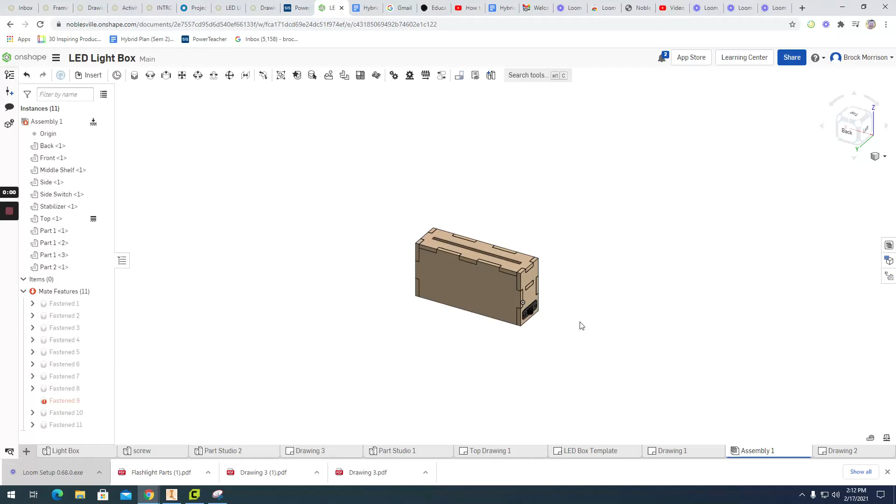All right, I'm going to do an exploded view demo for you. I have my assembly all set up. When you pull this up, your light box might look something like this. Go ahead and rotate it around until you have it positioned in a way where you can see the switch and the screws. It'll be easier if this is on the side that you can actually see.

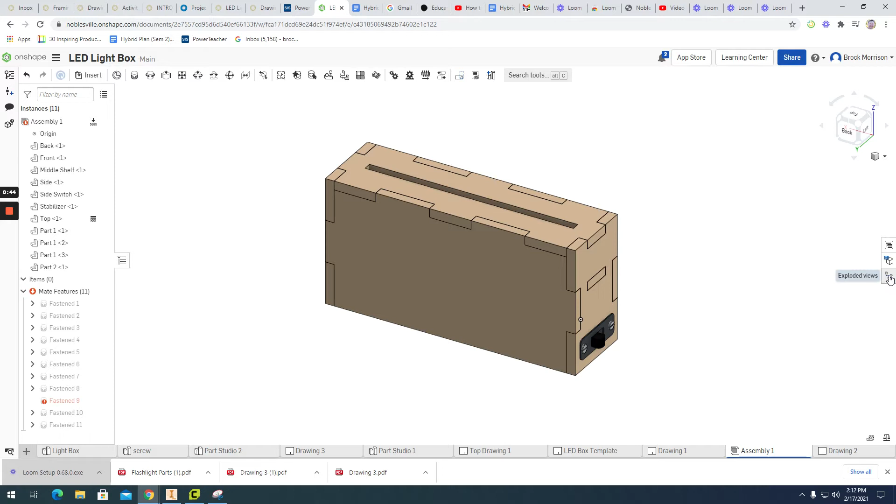To kind of square this up to make it look somewhat good, go over here to the view cube and just hit this little dot right on that corner, and it'll kind of swing it around just like so. So this is going to be the position that we're going to do our exploded view from. Over here on the right side we have three little buttons or tabs. The bottom one is exploded view, so let's go ahead and click on exploded view.

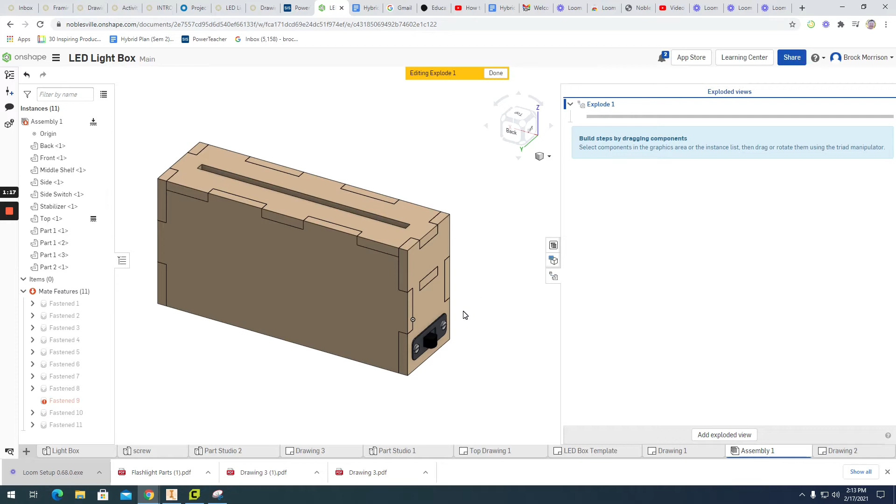And I am going to start to pull this thing apart. Actually, I've already done an exploded view, so let me delete that one. And for you guys it'll look like this because you don't have any exploded views. Add exploded view, and the first one just defaults to explode 1. And you'll know you're in exploded view editing mode when you see this orange yellow bar up here. So let's make this a little bit smaller so I've got some room. Slide it over. And let's start pulling this apart.

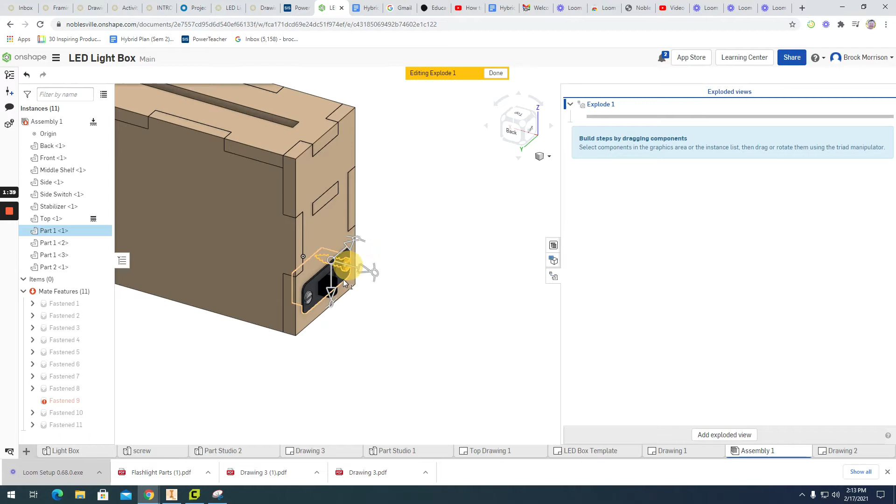First thing that I want to do is I want to grab all of these pieces in the switch, and you can click on them individually. Let's see, if I grab the screw, the other screw, switch. Sometimes it's tricky to hover over all of that. Depending on the order, it might be a little bit easier. And I also want this side. So I'm going to grab all of those things together, and I'm going to grab this arrow because I want it to pull it perpendicular to the object.

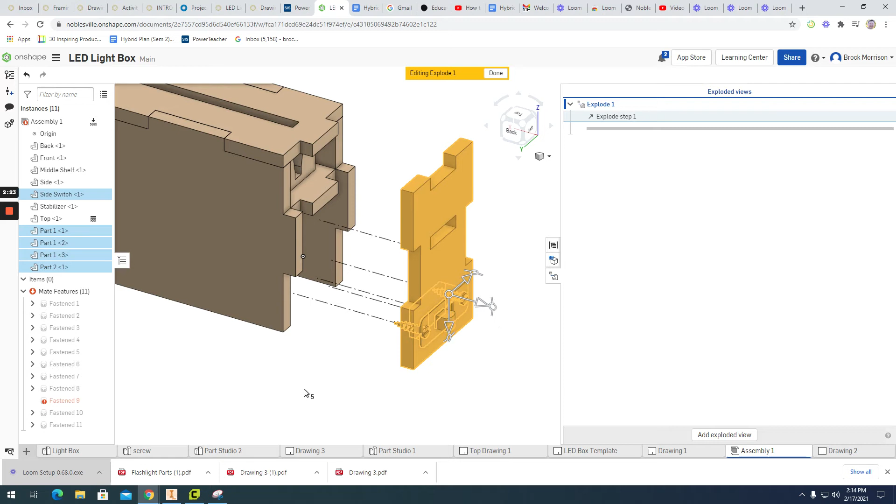As soon as I let go, this little dialog box opens up, and you'll see distance. And I've kind of just pulled it to a distance that looks pretty good, and it's really close to 2. So I'm going to click on this and actually enter 2 and hit the green check. All right. Double click anywhere, and it'll let go of all of that stuff.

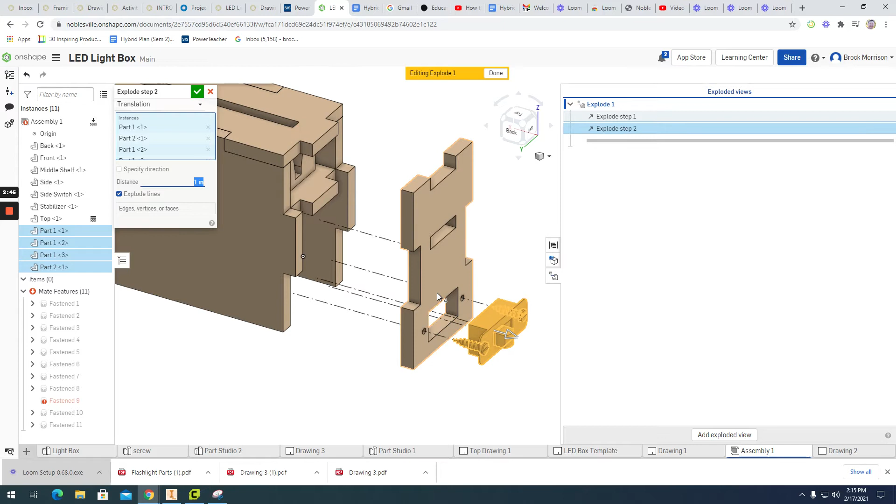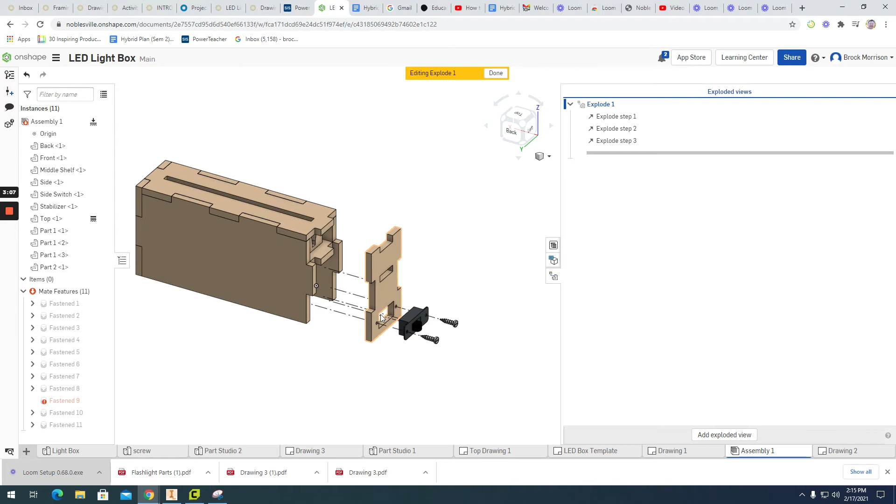And now I want to take these items, those items, and I want to pull that away. And I'm going to make this 1. Okay, and now hit the check. And now in the background somewhere, I want the 2 screws. And I'll pull those out from there. And I'll make that also 1 inch. Alright, so there we have some exploded view with the screws going into the switch, going into that opening, and then attaching to the sides.

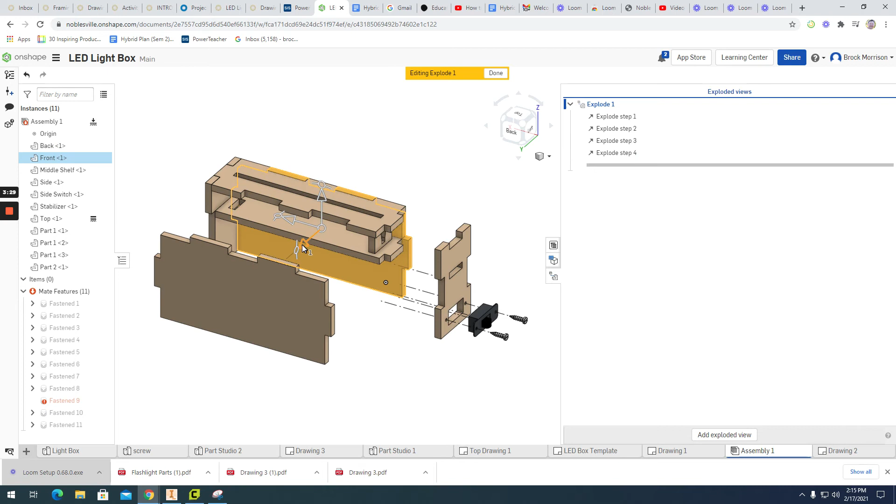Alright, so let's go ahead and break the rest of this apart. You're always grabbing the arrow that's pulling perpendicular from the actual object itself. I want this, I'm going to actually give this a little bit bigger distance. I'll go 3 inches on that one and hit the check. You have to hit the check every time you want to change parts or directions. I'll have that. Notice this was a negative because it's moving in the other direction. So -3 on that one.

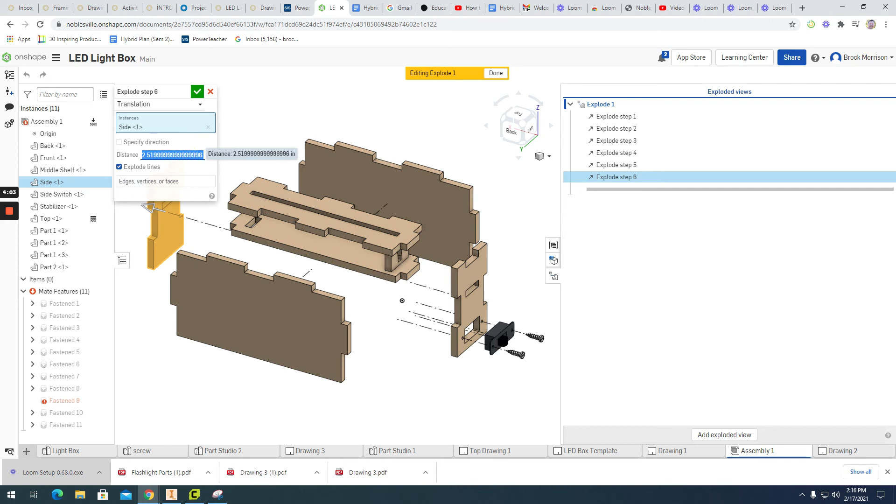I'll take this side. Whoops. And if you don't hit the check, then it assumes it wants to connect to that first part you pulled out. So I'm going to delete that side, hit the green check, and now I'm ready to do this piece. Pull that out in that direction. Paying attention, like I said, to whether you've got a negative sign or a positive sign, depending on your orientation, pull that piece straight up. I'll go 3 inches on that one.

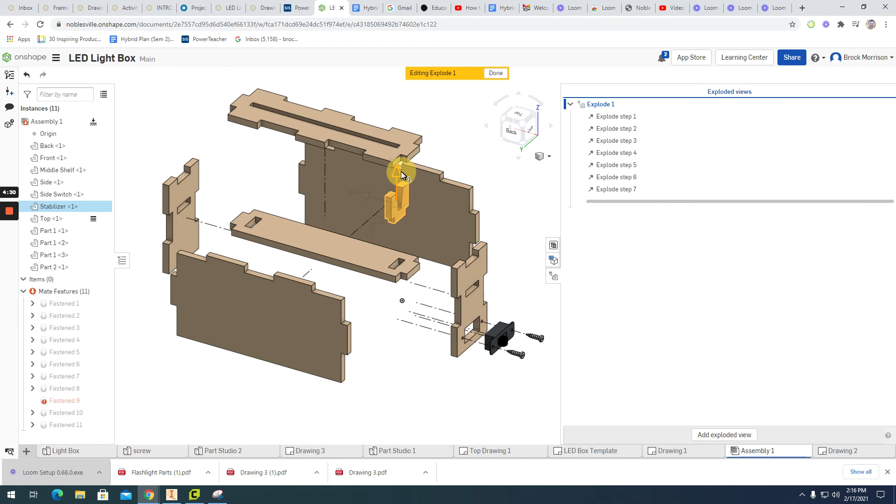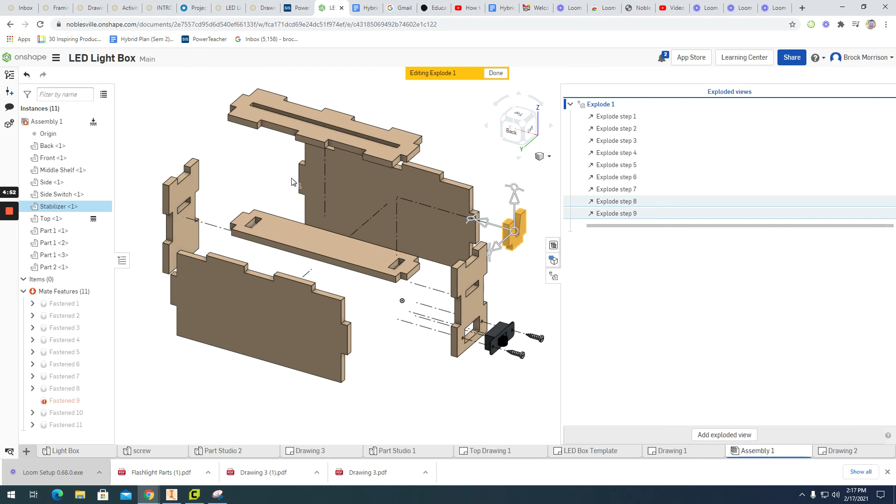I'm not going to do anything with the middle piece, but I'm going to take this piece, hit the check. I'm going to take this piece, I'm going to pull that up. I'm going to move this in 2 different directions. So I'll pull that up. I'll go 2 inches up and hit the check, hit it again, and let's move it in this direction. And I'm going to go minus, because there's a minus sign, -4 in that direction. There we go. And here we have our exploded view with all of our pieces kind of breaking away from that centerpiece. All right, well that is it.

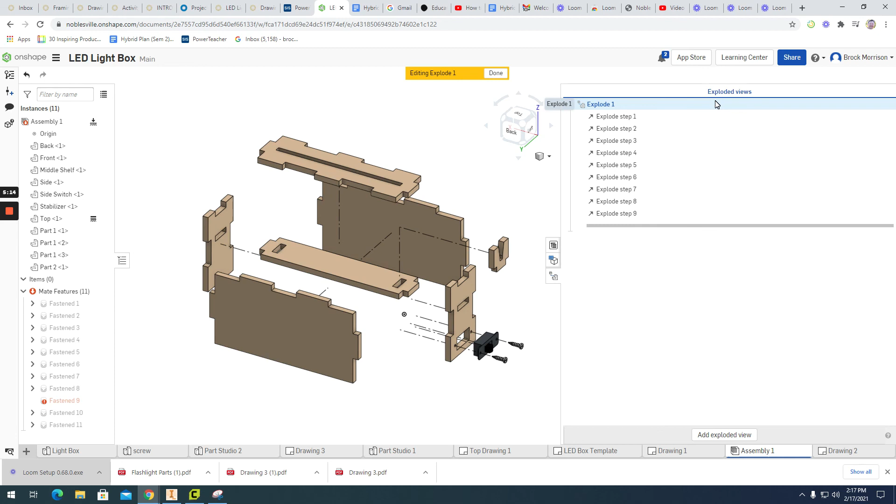We can close this little exploded view and you'll see that it takes up the full screen. If we actually click done on editing exploded view, it snaps back into our original assembly. I'm going to show you in a little bit how to do a drawing sheet with that exploded view tied into the drawing sheet.